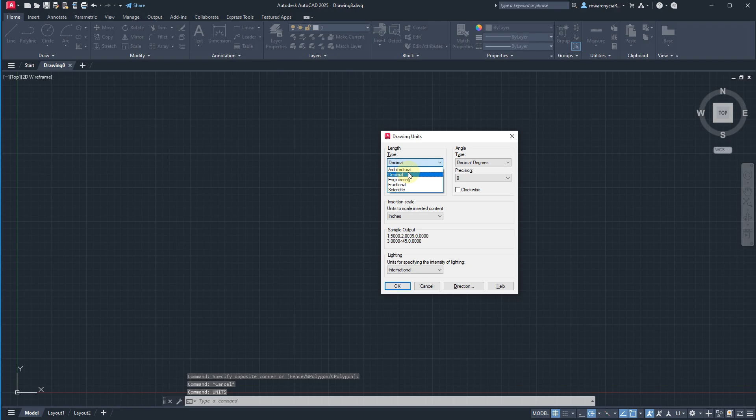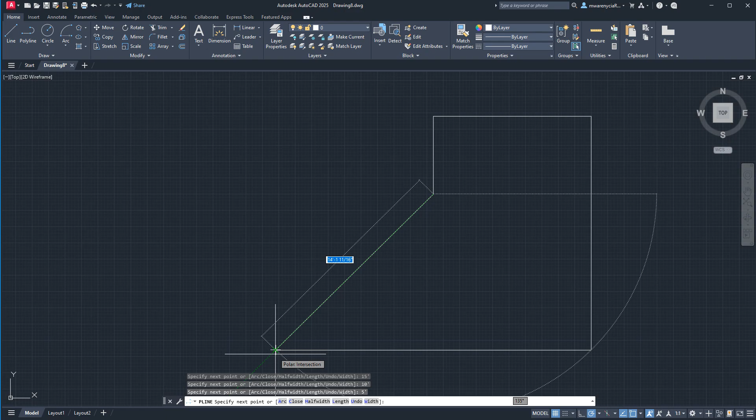Of course, we'll set our units first. Okay, so I'm not quite sure how big I want to build this, so I'm just going to freeform it. We'll do something like 20 feet that way, 15 feet that way, 10 feet that way, 5 feet that way. And then we'll just get a reference to this.

And then CL. So these will be our exterior walls right here. When we're working with exterior walls for the purposes of this class, go ahead and use 6 inches for the exteriors and 4 inches for the interiors. We'll kind of jump into what that represents or why we use those numbers later, but this is fine for now. So we'll go ahead and do an offset of 6 inches, and this will be towards the inside.

Now let's put an interior wall right here, and one of the things I wanted to show you guys is how you put an interior wall, and the wrong way to do it. I'll show you guys first. This is the wrong way to do it: you take this corner from the exterior, go here, and then you offset this 4 inches over. And you end up with this odd corner right here.

And what you want is to have smooth interior edges. This is probably something you guys do see in your sketchy landlord apartments in town. But the right way to do this is to have these flush walls.

So the studs are going to be going sort of... let me draw this at least. So the studs would be biased towards this side of the wall on the interior side, and then your exterior finishes are going to be a little bit thicker. So when you line them up over here and offset this 4 inches, this lines up with the way this would be framed. That's why we do it like that.

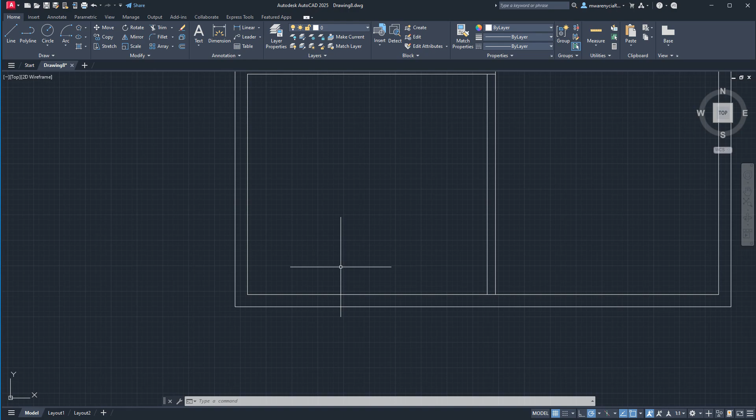A couple other things. So let's throw a couple doors and windows in here. I'll do this corner, we'll put in a door. The way I frame up doors is the door opening should be whatever the distance from this corner is that the thickness is. So I'm going to move this over 6 inches because this is on an exterior wall. And then we'll offset this 2'4".

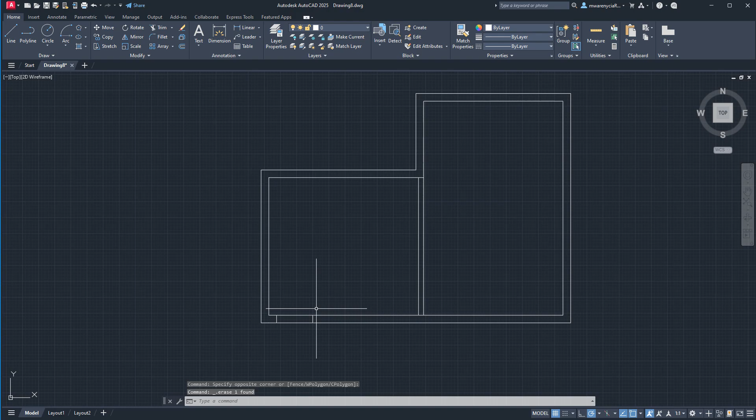Misclicked that one somehow. Okay, so we'll put a door there, and then let's center a window in each of these walls. So what I'll do is put a line going through there, and then we'll move these. We'll make these 4-foot wide windows. So we'll actually move this one over 2 feet, and then we'll move this up 2 feet, and then now we can offset these 4 feet over and over.

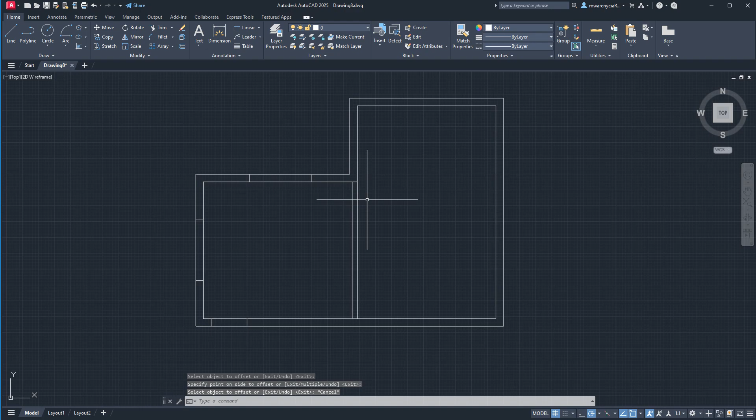Let's put another door in this wall too. And again, one thing I don't want to see you guys doing is, let me offset this. We'll do a 2'4" interior door here too.

What I don't want to see is a door that's just floating out in the middle here, unless you have a good reason to do it. If you are going to have a door that's on an interior wall, or just anywhere really, I want to see it typically biased.

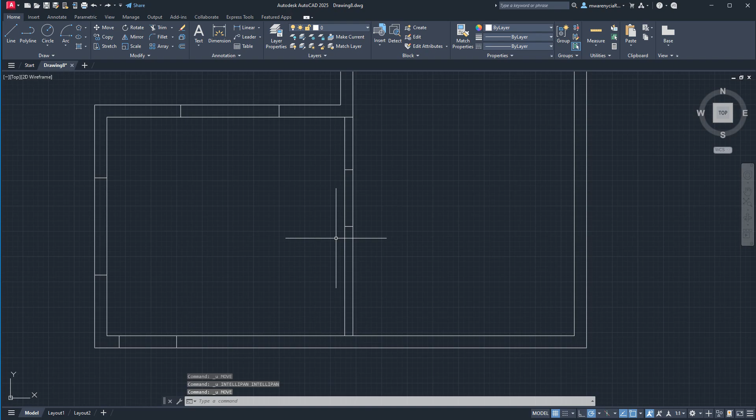I haven't placed this accurately, so I'll come back and fix it. But I'd either want to see it biased here, so it's against this wall for some reason, or biased down here where it's against that wall for some reason. Otherwise, you end up with doors in awkward spaces, or worse, you have it just slightly off, where maybe you've got whatever this amount of space is. You've got 10 inches behind the door where you can put stuff, but that's basically dead space, right?

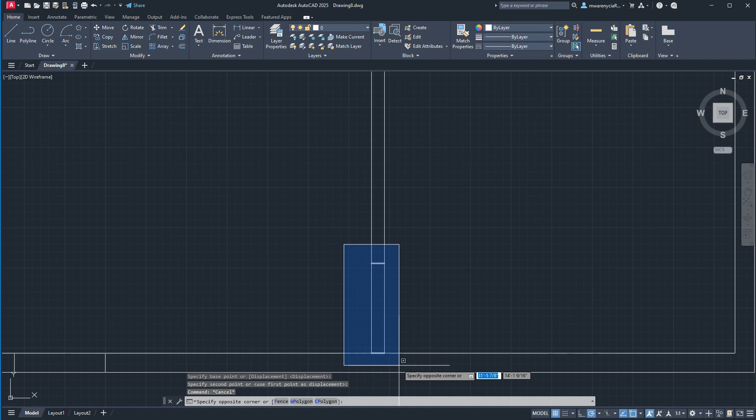So let me go ahead and move this. We'll put this down here actually, and then we'll move it up. Because this is an interior wall, I'm going to do 4 inches. So whenever I look at these corners, I should see a box, equal on all sides. So there's a box here, a perfect square.

Okay, so here's our spaces. We can now take this and go ahead and trim. I'll use the trim tool, just cut these out. And then I need to get that spot right there too, and that spot right there.

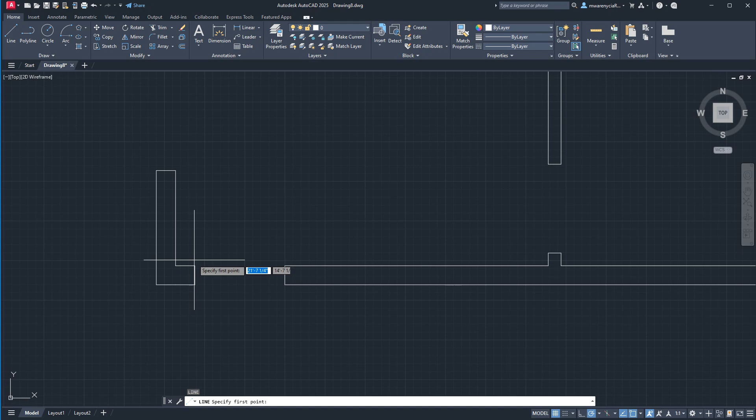So now we've got our walls. Let's go ahead and throw some doors in here. Next thing about doors, we did these all 2'4", so we can just do 2'4". I make them 1 inch thick, and we can close that up.

We'll go ahead and draw an arc here. Start, center, end. Start, center, and because it's going this way, I don't have to change anything.

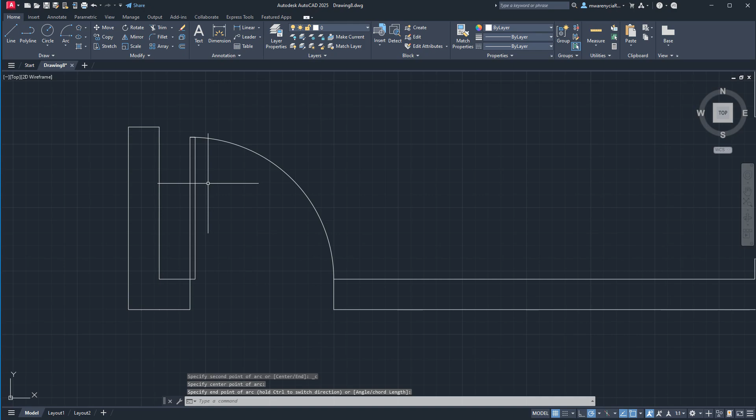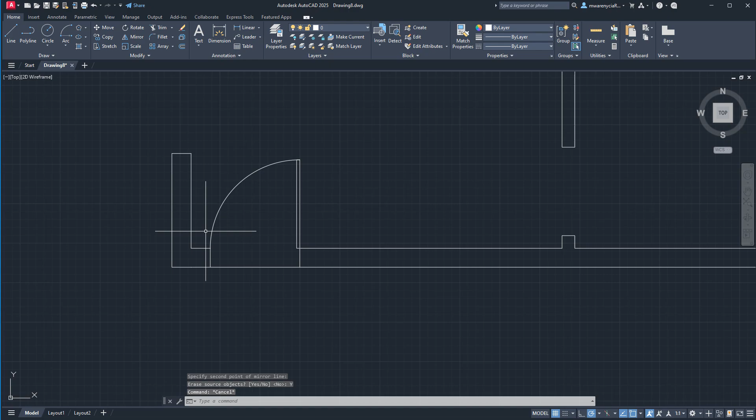Another thing about doors that I don't want to see is the opposite of this. So if I mirror this real quick... okay, if I mirror this, you can see that to get into this room it would be pinched in that corner, right? You'd have to open up this door at least halfway, if not most of the way, to really enter this space. I don't want to see that, so think about the direction your doors open when you place them.

Okay, let's talk about the windows. There's a couple different ways you can draw windows. As long as I can look at it and understand it's a window, I'm fine with it.

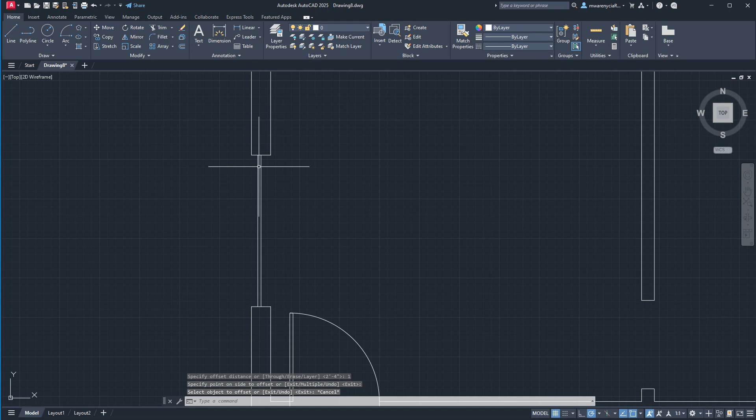So I'll take this, we'll offset this. I do my window panes 1 inch thick, so now I've got that. And then we have another 2 inches. We had 3 inches for this exterior wall, I did 1 inch right here, so now it's 2 inches to the corner. We'll do another 2 inches, so we'll do 4 inches of distance.

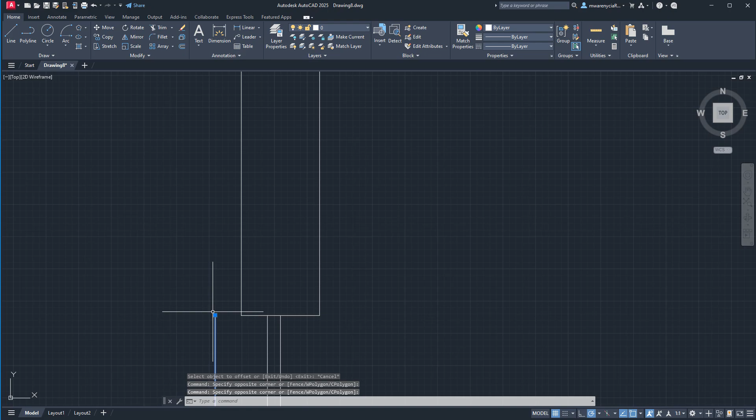Place that right there. This will be the exterior sill. I'll move this up 2 inches, and then I'll draw another line here, 2 inches. So that's the exterior windowsill.

And I do them in different sizes for the interior versus exterior, just because the size difference helps.

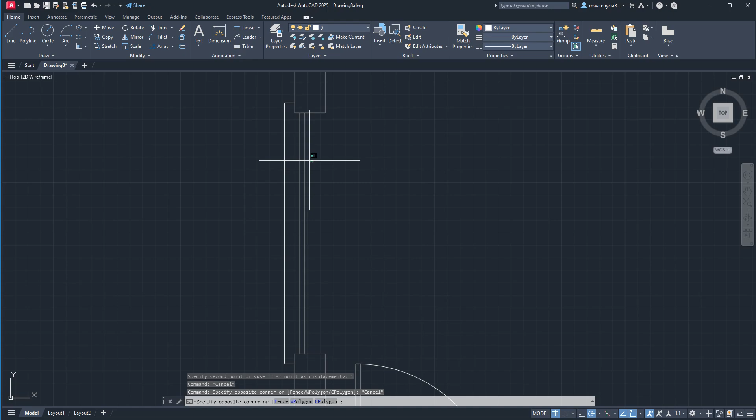And then we'll go ahead and move this in another inch, or out another inch rather. So again, this is 6 inches, 1, 2. So I have 4 more inches plus 1. So we'll offset this 5, and that should be 1 inch from there. And then we'll repeat the same thing as we did on the outside, except it will do it 1 inch and 1 inch. So 1 inch.

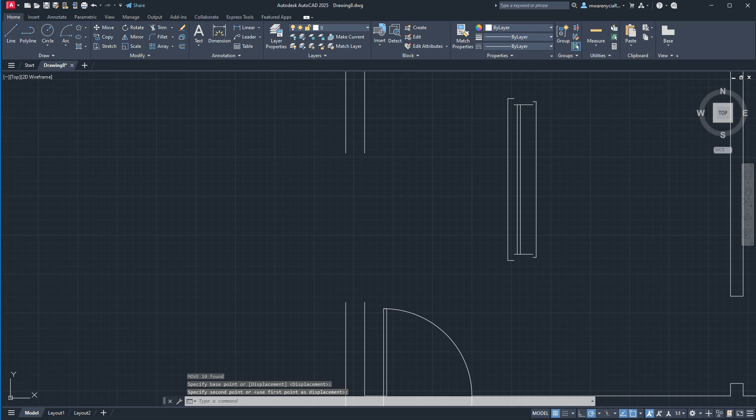Okay, so now that we've got this window, we can actually copy it to the next window. And when I select this, I'm going to make sure I don't just do that, because if I do this, I've grabbed the parts of the walls that were there, right? So I'm going to do 2 selections, half and half, and that's going to get me this. We'll go ahead and group this. So now it's a group.

There is another feature called blocks that we'll get into in another lecture, but that is not this lecture. And we'll go ahead and use, actually, and then we'll group the door too. So let's go ahead and group the door.

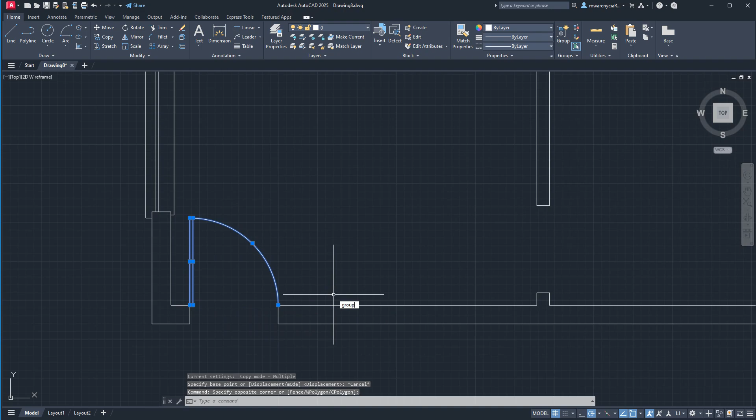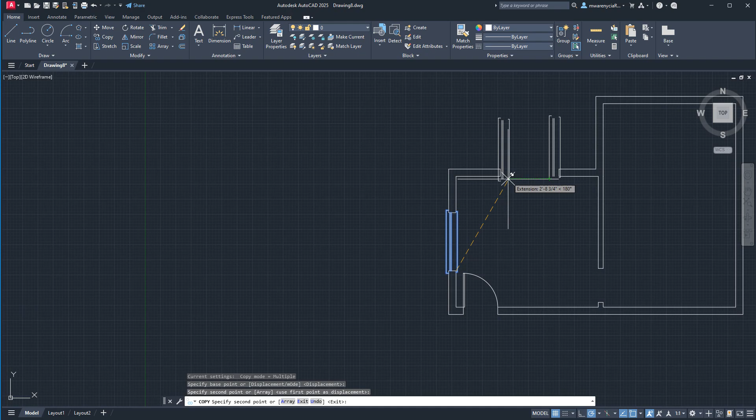And then now we can move these. Now, when I have you guys move things, I typically say get one fixed point that you can rotate with. So if I take this, I can grab any of these corners. Let's say I grab this corner right here; I need to find that equivalent corner that's up here, so that one right there. If I do this one, now I've got to do all kinds of weird movement to get this in the right spot. So I'm going to choose that same interior left corner right there.

I'm going to go ahead and delete that. We'll go ahead and use rotate, and we'll rotate this into position.

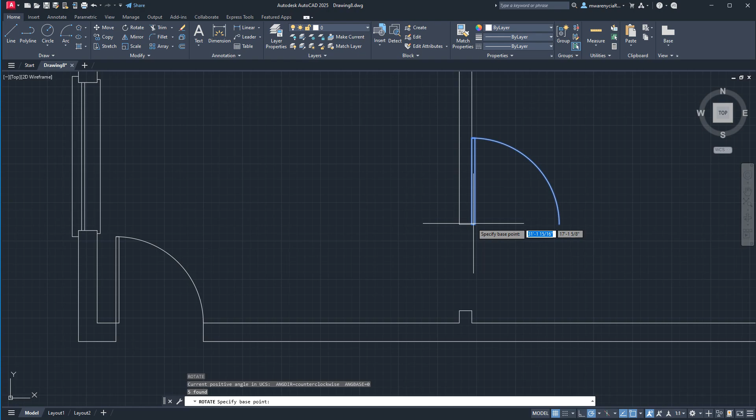And then we'll do the same thing. We'll grab this door, get the rotation point, and then I'm going to want this to rotate, or again, I'm going to want it to flip in a different direction than it's already kind of set to. So I'll go ahead and rotate it at least so we're going one direction correctly. Temporary line across here, mirror it, and flip it, and erase. And then we'll get rid of that little temporary line. So that gets us our doors, our windows, and then whatever this space is.

What you guys are going to run into pretty quickly is having to work with building furniture. While there are libraries you can get online, it's really helpful if you just kind of get used to building some furniture for yourself and building a furniture library.

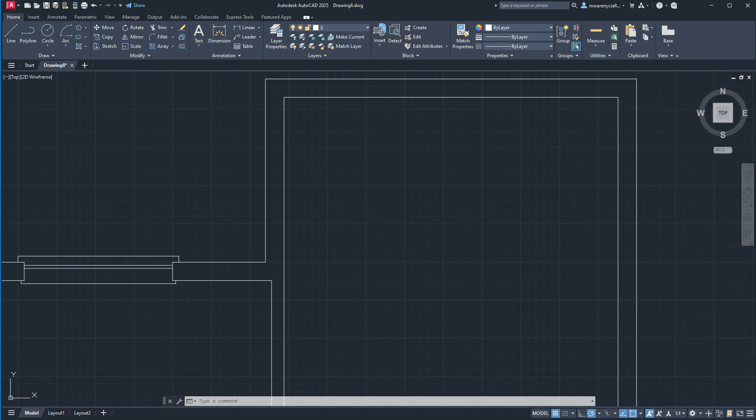So let's build a queen bed here in this room right here. A queen bed is going to be 60 inches wide, so I'll just do 60 and 80, 60 and close.

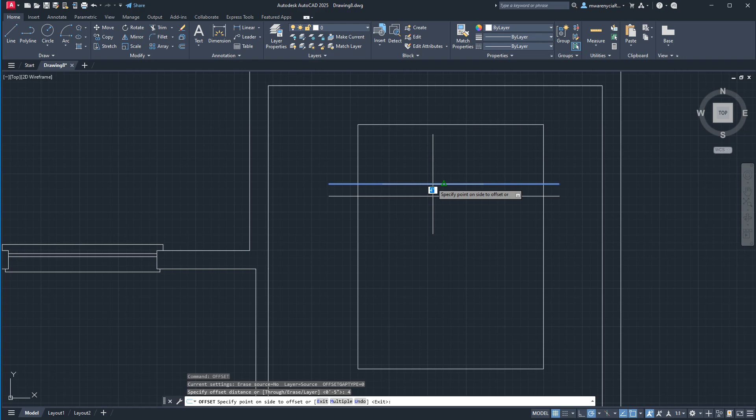Then just to kind of indicate that this is in fact a bed, what we'll usually do is put a line across here for the sheet, offset this say 4 inches down that way, and then we'll do a 45-degree line here, offset that 4 inches, and then we'll go ahead and trim this all out.

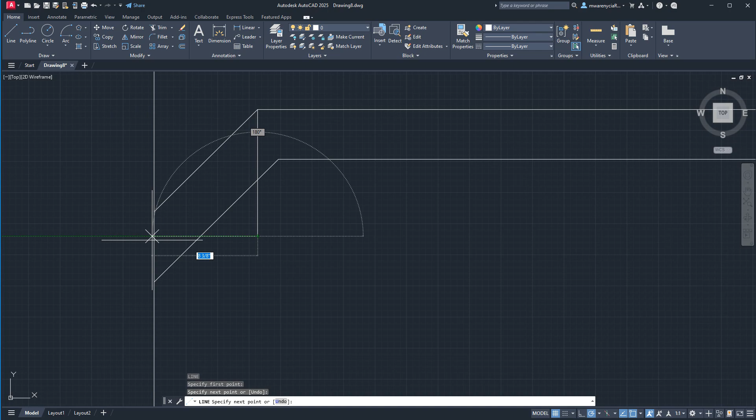I'll actually leave that there. I wanted to trim that.

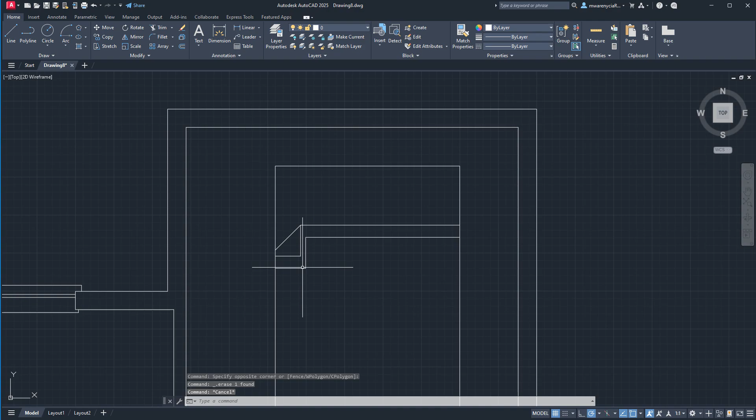Trim, okay, so there's our bed, and then we can also throw in pillows here. Just two simple boxes, we'll make one, and then we can just copy this over. It doesn't have to be exact because it's a bed, or at least it's just a pillow.

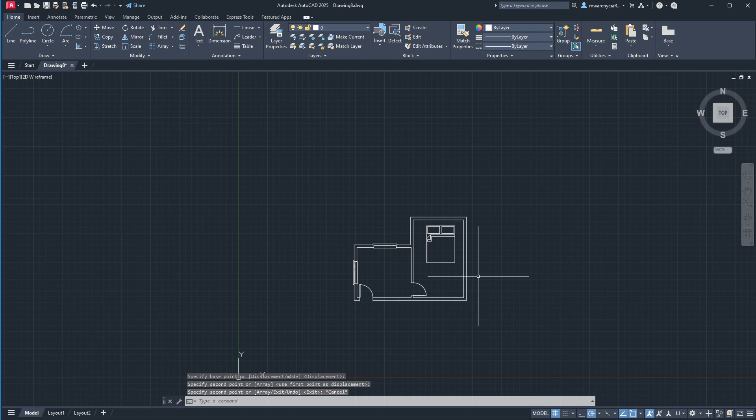If we want to get fancy, we can come in here and do a 2-inch fillet on a radius. Make sure you set M for multiple before you start, and just round some of those corners. That kind of makes it look a little bit nicer.

Screwed it up. There we go. Accidentally clicked out. All right.

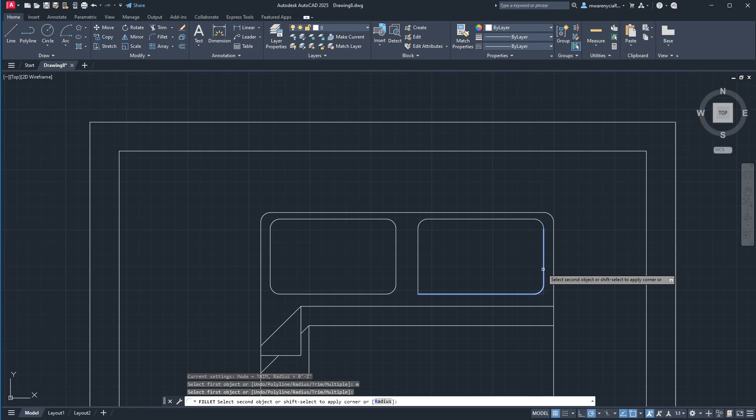So we've got there just a very basic bed. Again, for now, we'll group them. I haven't gotten into blocks yet.

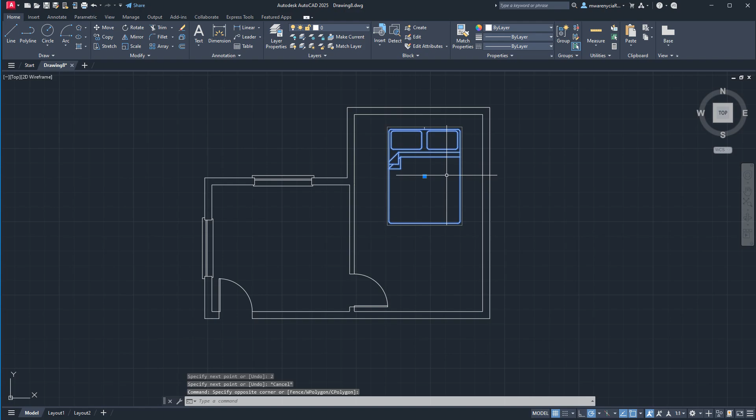To place this and center it against that wall, what I will usually do is draw a little temporary line here. We don't even need to use that temporary line. I'll just do a selection that grabs... oh, I'm sorry, I grouped it. So now that this is here, I can grab this as a relative handle to move this bed, click on that, and now I can position it, and you see that that line stays behind. So that's one of those areas where you can plan a little bit ahead and do things.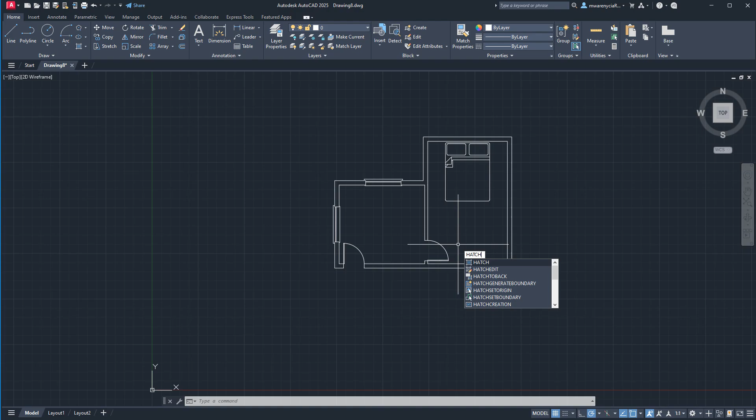Okay, so let's go ahead and throw some hatching in here for the walls. So we'll do hatch, we'll do that, and we'll do that. Nope, not that one. No. Okay, so we've got our walls filled in there.

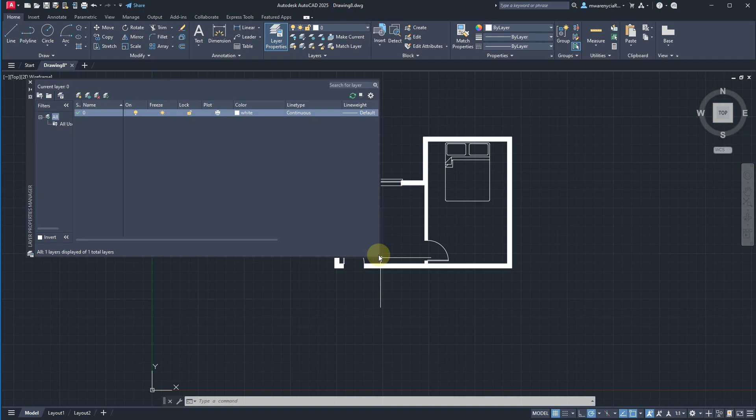Let's go ahead and make a couple layers. This is just kind of a quick demo, so I'm not taking this one too seriously, but I'm just trying to show you guys the workflow. So we'll go ahead and do walls, doors, windows, furniture. And now we'll just go through, we'll select, say, our doors, move them to the doors layer.

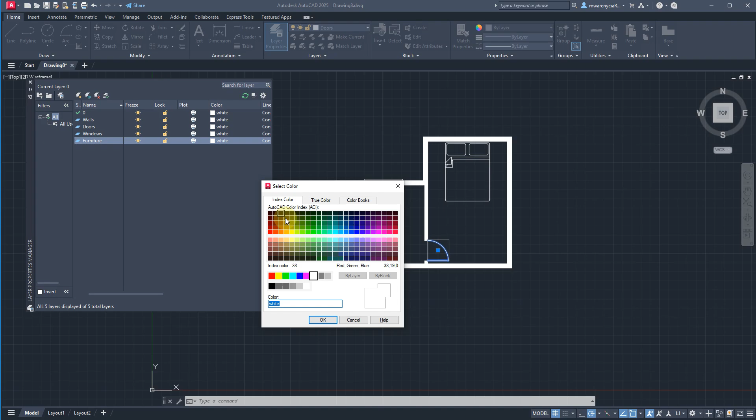Actually, let's color these too. So furniture will do green, windows will do that cyan color, doors will do orange, walls we'll leave white.

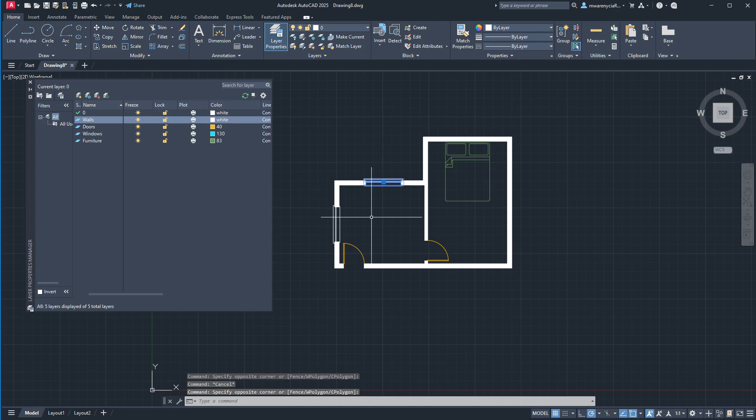So let's go ahead and move everything over to the appropriate layer. This to the furniture, put our windows on the windows. Okay, so now that those are assigned, let's go ahead and throw this into layout.

So we'll click over to our paper space, close that. Let's go ahead and double click in here, get rid of that grid. We will set our scale to 1/4 inch.

Actually, let's go ahead and create another layer too for this, this will be viewports. And again, I'll make it that fuchsia color so I know I don't want to see any of that. Then we'll go ahead and hide the viewports, or freeze them rather. Move that over there. As long as we don't need to modify it any further, it's fine.

Oh, it's not going to play nice with that.

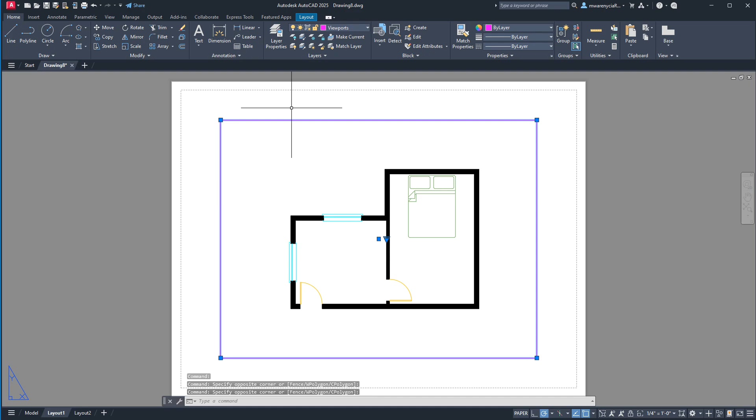Okay, so we'll go ahead and turn it off. Okay, so there we have that. Fairly simple—it's just quickly put together walls, doors, windows, furniture.

From there, we will expand upon this in further videos. We have a couple things that we need to cover, like blocks, dimensioning, labeling, title blocks. We've got a whole set of videos. So this is just kind of the first part, to get you into it, get you used to using the tools, and yeah, all that stuff. So I'll go ahead and wrap it up here and see you guys in class.